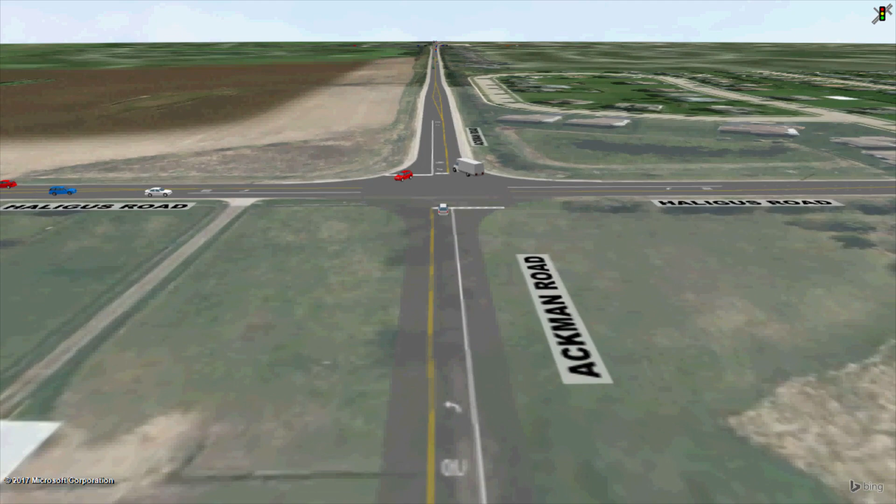Hello, everyone. My name is Emily Dauscher, and I'm the Planning Liaison at McHenry County Division of Transportation. Joining me are Ryan Peterson, Transportation Planner, and Scott Hennings, Assistant Director of Transportation at the DOT. This presentation has been pre-recorded for viewing before, during, or after the live meeting, and it will walk you through some of the work done to date on the Ackman Road Feasibility Study.

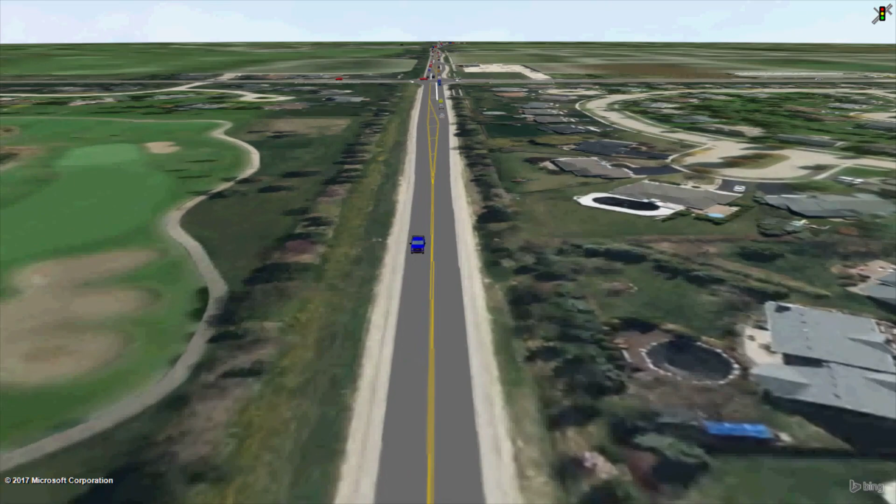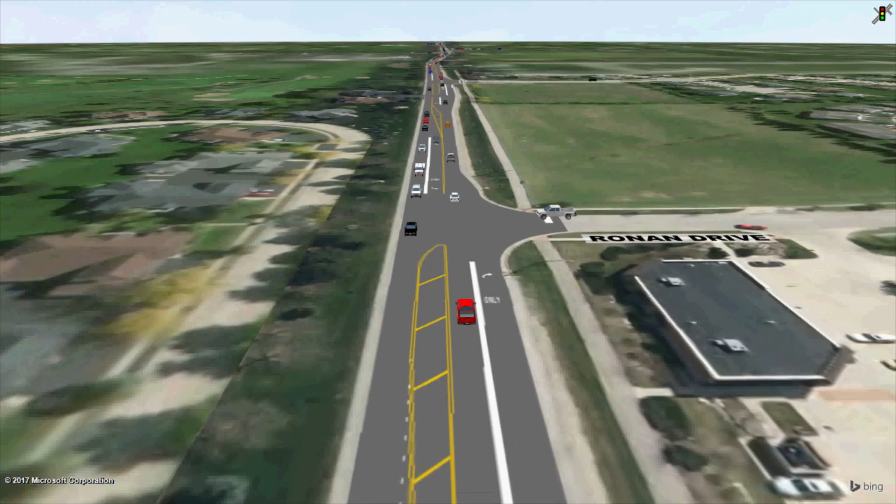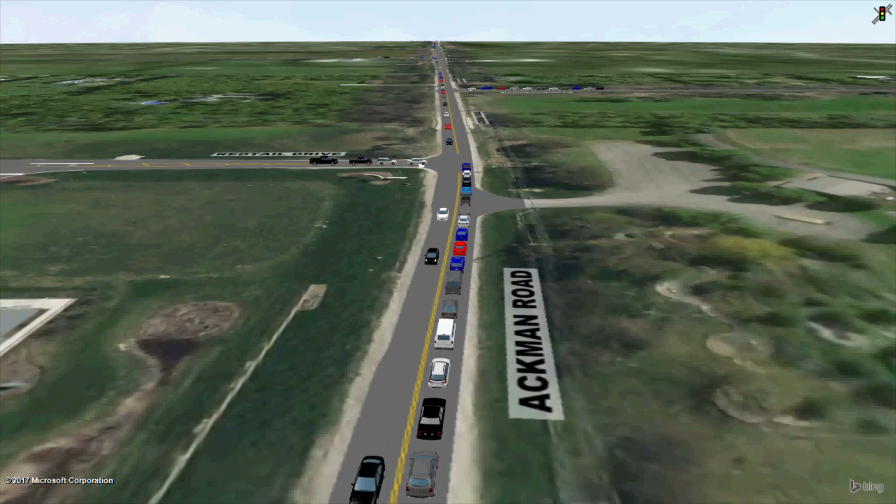What you're seeing now is a video of Ackman Road and what it'll look like in 2050 if no changes are implemented. During this presentation, I'll start us off with some information about the study and the need for the project. Then Ryan will discuss the 3 segments of the project, as well as a couple of the different concepts for the roadway. Following that, Scott will talk about traffic operations and the information that was determined throughout the study. Finally, I'll end the presentation by talking about the project's next steps in the September 29th live meeting.

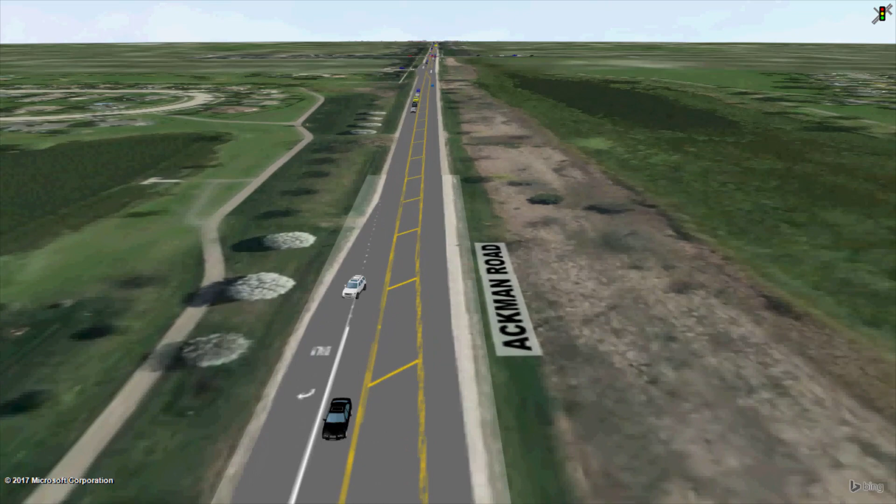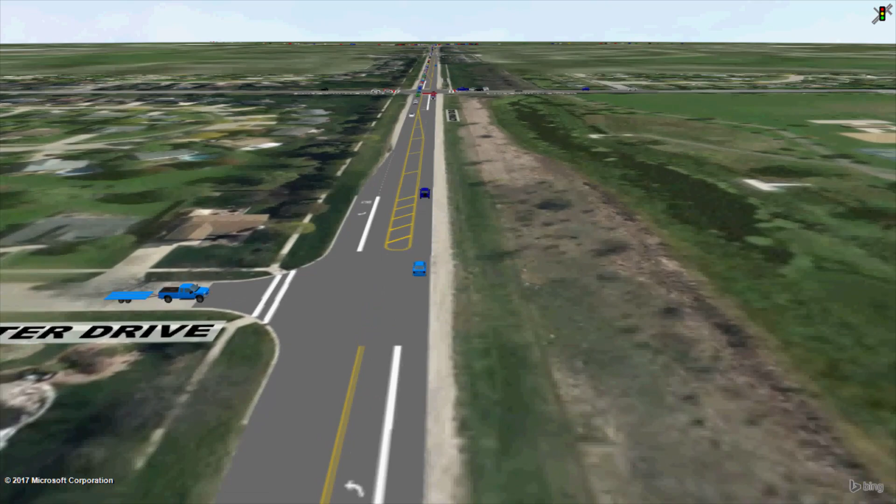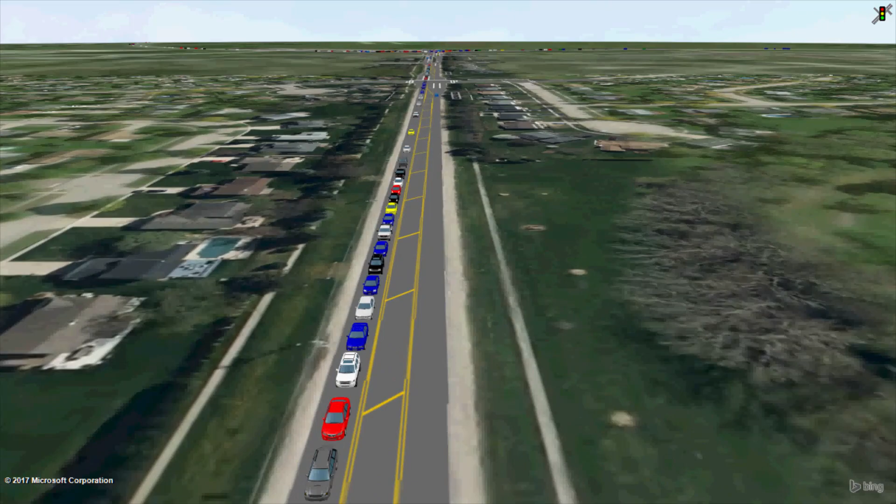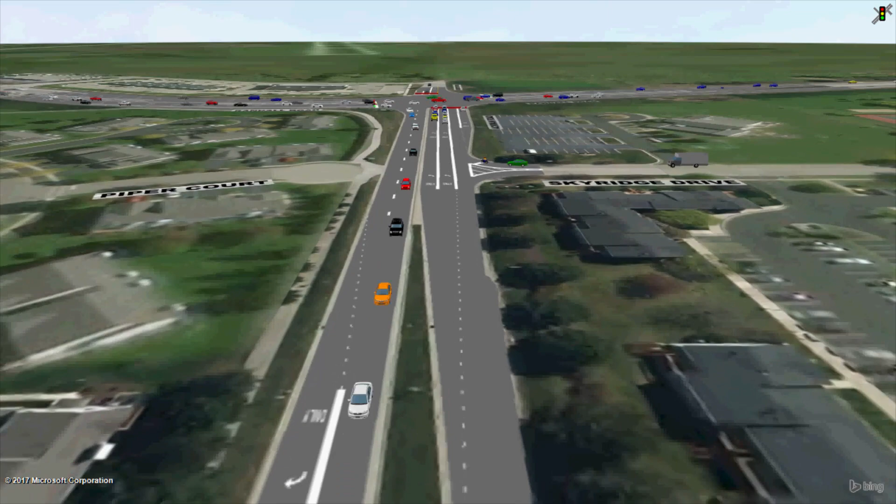As mentioned, this meeting is for a feasibility study on Ackman Road from Haligus Road to Randall Road. The purpose of the feasibility study is to look in depth at possible engineering solutions for the corridor. Since the first public open house meeting on May 30th last year, the DOT, along with its consultant, TranSystems, has been looking at the existing conditions to identify different alternatives that address 3 key project needs: safety, traffic operations, and connectivity. Once identified, those alternatives can be examined further during future project phases, including preliminary engineering, design engineering, land acquisition, and then construction. Identifying preferred alternatives also helps with identifying potential funding opportunities for the project.

Let's review 3 key project needs that are being addressed by this feasibility study in a bit more detail. The first is safety. Along Ackman Road, there are undefined shoulders, areas with poor pavement condition, and poor drainage, as well as intersections with tight turning maneuvers. Off the roadway, sidewalks are narrow or non-existent, and the corridor lacks a defined space for cyclists. There are also unmarked crosswalks throughout the corridor, making it difficult for people on foot or bike to get across the road. The second need is traffic operations.

Traffic operations refers to the movement of vehicles through an intersection. Key components of efficient traffic operation include turn lanes, traffic controls, storage bays, and turning radii. One way to measure efficiencies in traffic operations is through measuring the level of service. Think of the level of service as how easily or comfortably a user can travel through a corridor or intersection. Level of service is measured from A to F, with A and B being the most favorable, C and D being moderate, and F being the least favorable. Throughout the corridor, a lack of turn lanes at intersections contributes to a poor level of service and negatively impacts traffic operations.

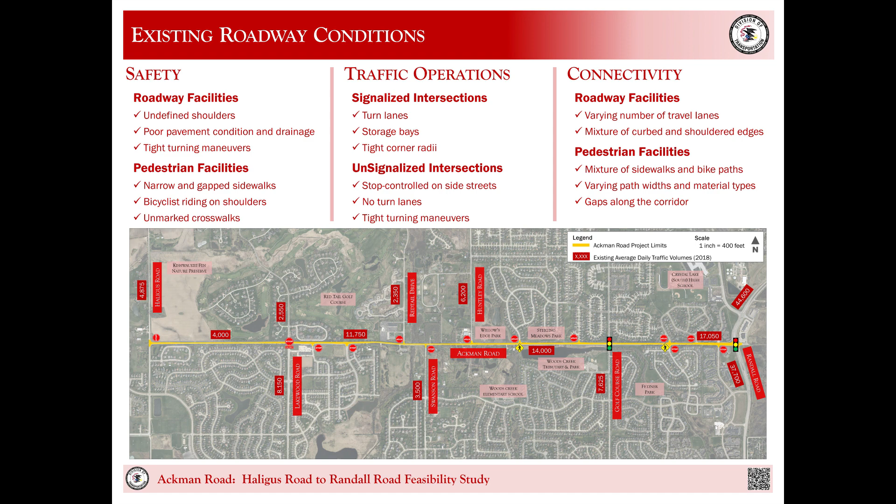Thanks, Emily, for the great introduction. As Emily mentioned, I'm Ryan Peterson. I'm a transportation planner for the McHenry County DOT. I'm going to be talking about a variety of different topics relating to the Ackman Road project. The first topic I want to talk about is the division of segments for the Ackman Road project. So to make it easier for attendees to ask questions and for staff to provide more in-depth answers, we have divided the corridor into 3 segments. Segment 1 is from Haligus Road to Lakewood Road. Segment 2 is from Redtail Drive to Huntley Road and includes the intersection with Swanson Road.

Segment 3 is from Golf Course Road to Randall Road and includes the Westport Ridge intersection. The project plans to address the identified needs on all 3 segments, but different treatments or strategies may be employed for each section depending on the traffic volumes, adjacent land uses, and/or existing conditions. We hope that this feasibility study will help us prioritize which segment has the greatest existing need and the most consensus from the public on solutions.

We will then look to accelerate engineering on that segment first and address the remaining segments at a later date. We also hope this project will give us an idea of potential interim improvements that can be made immediately and at a low cost. Finally, this feasibility study will consider and be consistent with other long-term transportation projects in the area.

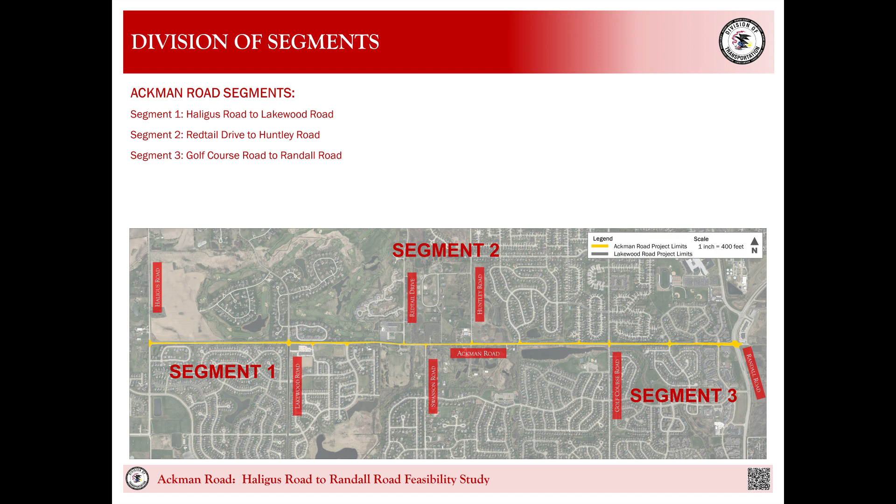For example, both alternatives for Segment 1 will plan for the future extension of Ackman Road west to Illinois 47. The extension project is included within the county's 2040 long-range transportation plan and is supported by the Village of Lake in the Hills. The 2050 projected traffic volumes you will see later in this presentation take this extension project into account.

The second topic I want to talk about are the 2 different cross-section designs proposed by our consultants. The county is looking for input on 2 different cross-section designs, a rural design with shoulders and ditches, and an urban design with curb and gutter. A roadway cross-section displays the desired width, slope, and elevation of a roadway design. The major differences between the 2 proposed cross-sections is the placement of the multi-use path and the overall width.

In areas with constrained right-of-way, the urban section is usually preferred. The rural cross-section allows the multi-use path to be placed further away from the roadway, while the urban cross-section brings the multi-use path much closer to the roadway.

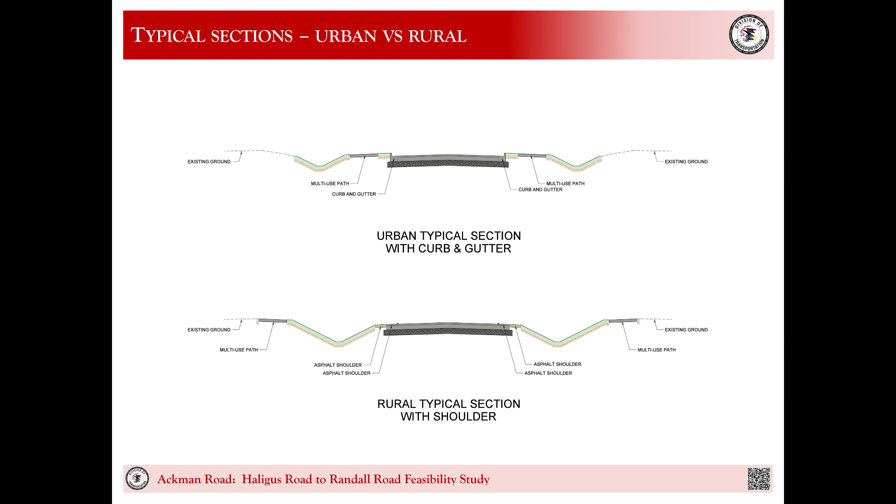And the last topic I want to talk about are the existing bicycle and pedestrian facilities along the project. Currently, on the west end of the project, there's an 8-foot wide shared use path on the south side of Ackman Road, starting just east of Lakewood Road, that travels for approximately 0.3 miles before terminating in front of the residential area east of Albrecht Road. Continuing east, there are no existing bicycle or pedestrian facilities until Amberwood Drive.

On the east portion of the project limits, there are a mixture of sidewalks and shared use paths. A sidewalk on the north side of Ackman Road runs from Sterling Meadows Park east through Golf Course Road and continues to Randall Road, where it connects to a shared use path that runs north to Crystal Lake South High School. At Sterling Meadows Park, the sidewalk connects to a shared use path that runs to the west and enters Willow Edge Park, where the path then turns north along Huntley Road.

The new rapid flashing beacon crossing on Ackman Road at Amberwood Drive, just east of Huntley Road, is located along this path connecting to the shared use paths that run through Woods Creek Park and Fetzer Park along the south side of Ackman Road.

While many bicycle and pedestrian accommodations are present, the Ackman Road corridor does not have the desired connectivity considering the residential nature of the neighborhood and the proximity of a nearby high school and several grade schools. Not to mention there are 15 recreational spaces in the corridor, which are currently not accessible by walking or biking. By connecting these short segments of sidewalks and shared use paths, it will greatly improve the safety and accessibility for those wishing to access all of the amazing amenities offered throughout this corridor.

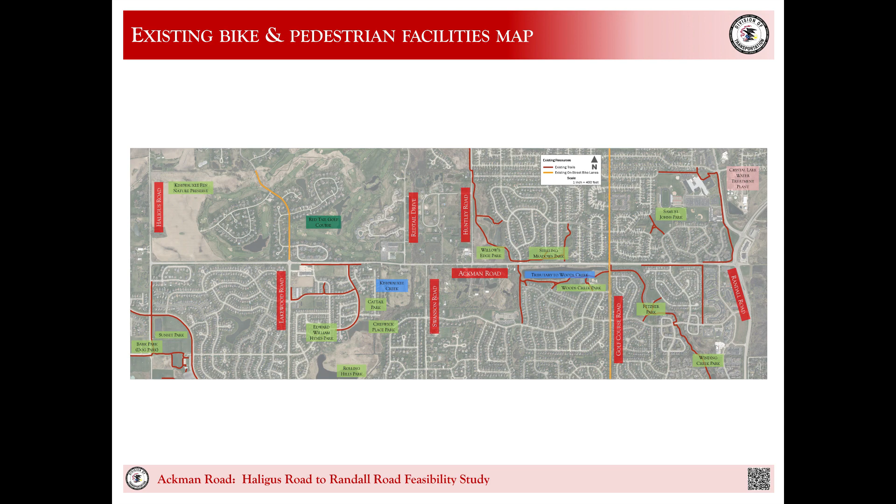And now I'll turn it over to Scott Headings, who will talk more about the project.

The need to improve traffic operations at the intersections along Ackman Road was frequently cited by many attendees at our May 30th, 2019 open house. Typically, roadway agencies improve traffic flow at intersections in one of 2 ways: by installing a traffic signal and associated turn lanes, or by constructing a roundabout. These 2 intersection designs provide several unique advantages, but also each have challenges that need to be considered.

Traffic signals are the most common intersection type that most drivers experience on a daily basis. MCDOT has 42 intersections in its system with traffic signals, while IDOT and other local governments have many more on their systems. Traffic signals have the advantage of reducing intersection delay when compared with stop sign control. They also typically require less right-of-way than roundabouts, even when you factor in additional left and right turn lanes that may be needed.

Finally, traffic signals can utilize emergency vehicle preemption, whereby emergency vehicles are given a green light as they approach the intersection. However, traffic signals also pose some challenges when compared with other intersection designs.

For one, the potential for serious or even fatal collisions can actually increase at an intersection after a traffic signal is installed. Collisions that occur at signalized intersections tend to be more severe rear end and angle crashes with vehicles traveling at high rates of speed.

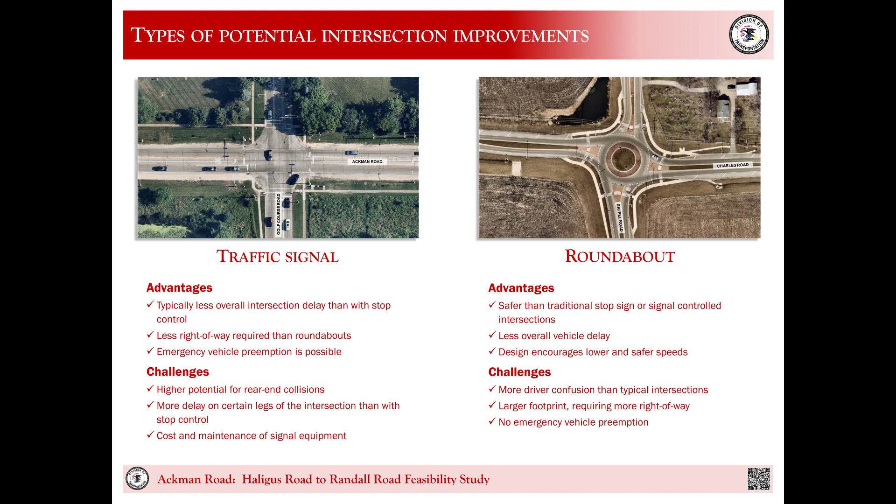Roundabouts typically require more right-of-way and have a larger footprint within the proximity of the intersection when compared with a signalized intersection. However, as you move away from the intersection, the right-of-way requirements decrease dramatically since roundabouts require fewer turn lanes approaching the intersection.

As Ryan mentioned earlier, this feasibility study divided the Ackman Road corridor into 3 main segments. The first being from Haligus Road to Lakewood Road, the second from Redtail Drive to Huntley Road, and the third from Golf Course Road to Randall Road. For each segment, the study team looked at a few different options or alternatives and compared them against the existing conditions. The alternatives were scored against a set of criteria that considered safety, mobility, environmental impacts, and cost.

So let's jump right into segment 1. Currently, the Haligus and Lakewood intersections are stop controlled. Option 1 looks at adding a traffic signal and turn lanes at Haligus Road, while leaving the Lakewood Road intersection with a stop control. Option 2, on the other hand, looked at the potential for roundabouts at both intersections.

This slide shows an aerial view of the 2 intersections under option 1. You will notice that the map on the left shows Ackman Road extended west beyond Haligus Road, which is a future project identified in the county's long-range transportation plan. The Ackman-Lakewood intersection is shown to remain a 4-way stop because traffic signals were not warranted at this location in the future design year of 2050.

This next slide shows option 2, which proposes roundabouts at both intersections. The medians and the center of the roundabouts are shown to be landscaped, and pedestrian crossings will be added to all 4 legs to connect the proposed sidewalks and trails.

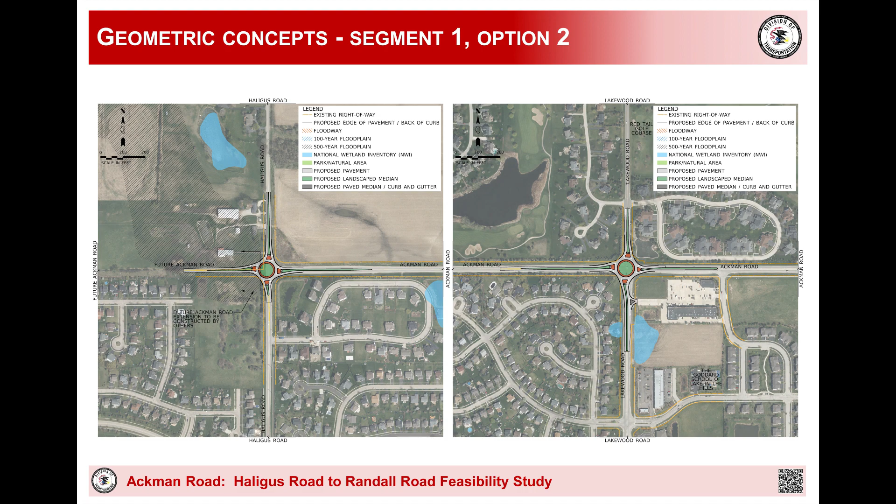When comparing options 1 and 2 against the 2050 no-build conditions, which shows the intersections with no improvements, both options performed well in the mobility category, improving the overall level of service and delay at the intersections. The roundabout alternative performed better than the traffic signal alternative in the safety category, as well as the water quality and cost categories.

Next, let's move on to segment 2, which encompasses the Redtail, Swanson, and Huntley Road intersections. Currently, vehicles approaching Ackman Road from the 3 north-south roads are required to stop and wait for an opening in traffic to make their turn onto Ackman Road.

Option 1 maintains the free flow of traffic along Ackman Road and a stop control for the 3 minor streets, but adds turn lanes at the Redtail and Swanson intersections. This alternative would allow traffic to flow more smoothly along Ackman Road because turning traffic would not interfere with through traffic as it does today.

Option 2 adds a traffic signal and turn lanes at all 3 intersections, while option 3 adds a roundabout at all 3 intersections. Note that the Huntley Road intersection is shown with a right turn bypass lane to handle the higher traffic volumes at this intersection.

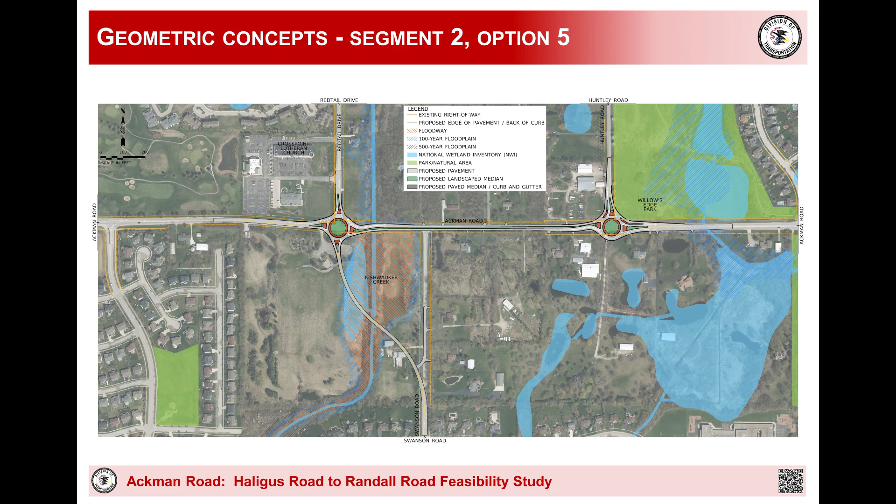When comparing these 5 options against one another, it is easy to become overwhelmed by the amount of information. Looking at safety improvement only, the roundabout alternatives scored the best. Each option improves the overall level of service when compared against the no build in year 2050. However, it's important to understand that under all options, vehicle delay will increase when compared with the conditions today. Looking at the property acquisition criteria, options 1 and 2 scored the best. And when comparing cost, the roundabout options typically scored better than the traffic signal options.

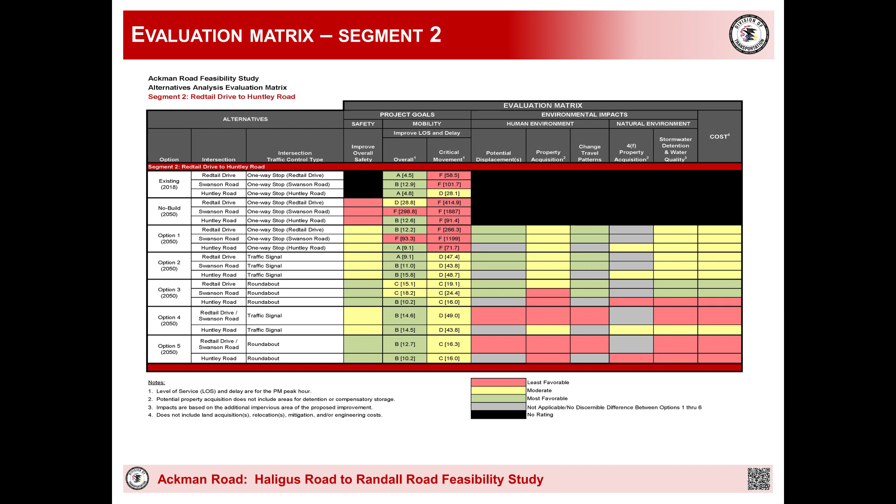Finally, let's move on to segment 3, which looked at the area from Golf Course Road to Randall Road. Today, the intersection with Golf Course Road is signalized, but lacks turn lanes to separate through traffic with traffic making right turns. The intersection with Westport Ridge is a 2-way stop controlled, while the intersection with Randall Road is signalized and fully built out with all turn lanes. Generally, no improvements are being considered at the Randall Road intersection.

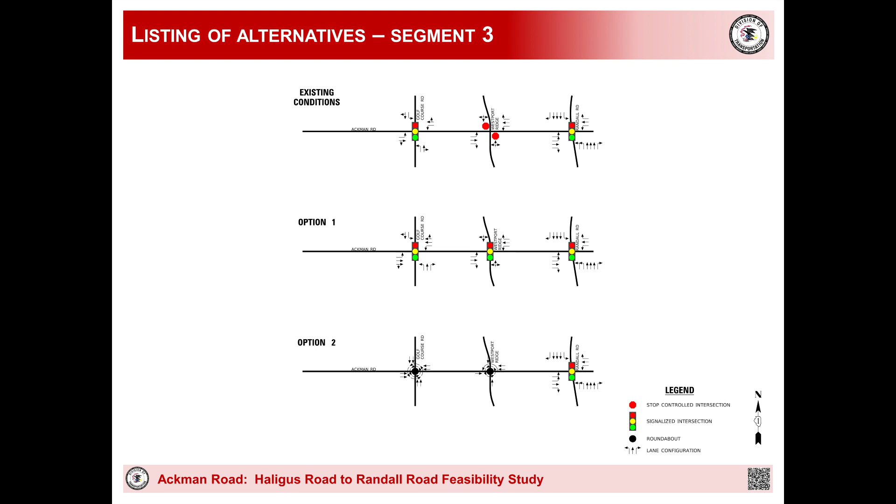Option 1 considers the addition of through lanes on Ackman Road, along with a northbound right turn lane on Golf Course Road and the signalization of Westport Ridge. Option 2 considers the installation of a multi-lane roundabout at the Golf Course intersection and the installation of a single-lane roundabout at Westport Ridge.

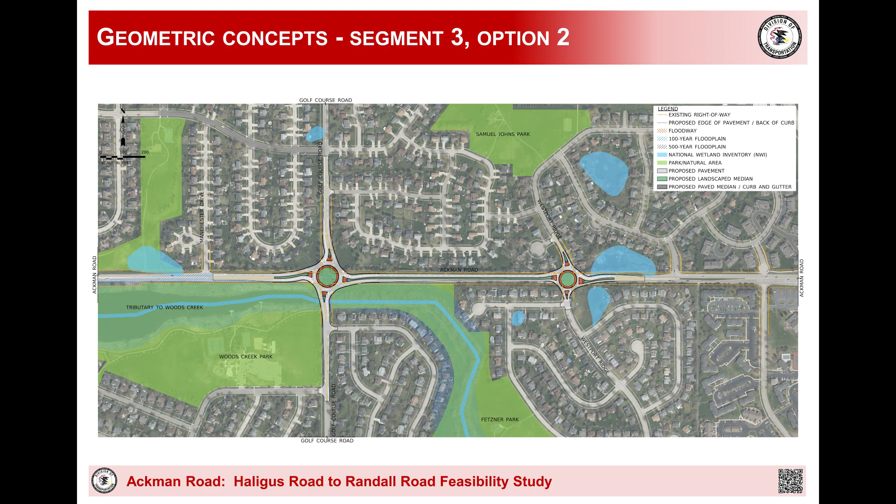Both options improve safety over the no build, but again, the roundabout is superior to the traffic signal for reducing serious and fatal crashes. Both options improve mobility for drivers over the existing conditions. However, the roundabout option performs better than the traffic signal option, especially for the critical movement during the peak hour. Due to the larger footprint of the multi-lane roundabout, the traffic signal option performs better on the potential displacement and property acquisition categories.

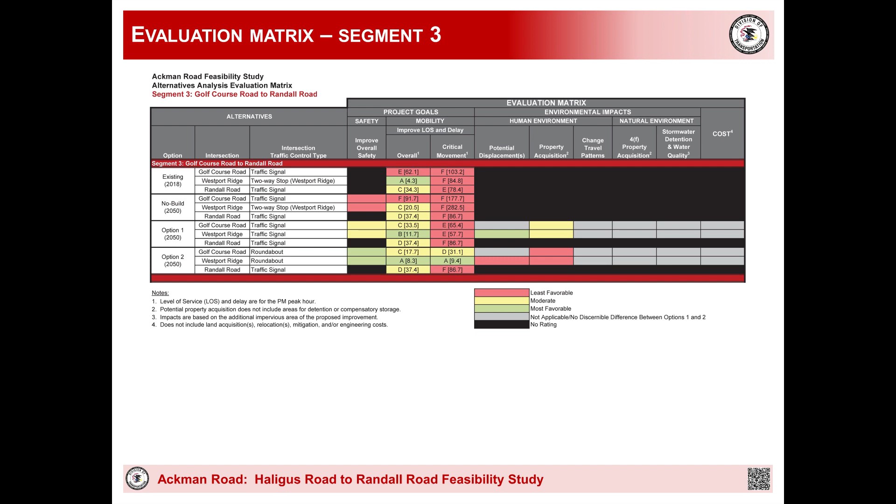Once the feasibility study is concluded, the project will move into engineering to develop more details for the selected solutions. By the end of this study, DOT will have learned about the community interest in the project. This includes not just those who use the roadway or live near it, but also the municipalities along the corridor, which includes Lake in the Hills, Lakewood, and Crystal Lake. The chosen solutions that are carried forward from the study will be selected based on feedback from the community, municipalities, and users. The chosen solutions will also take into account the roadway itself and what improvements are needed based on modeling, traffic data, and other information.

The identified solutions will open up the project for possible federal, state, or regional grants. Depending on what alternatives are chosen, different funding sources may be pursued. Some grants focus on bicycle and pedestrian improvements, some look at safety or congestion, and others are for creating safe routes for kids to walk or bike to school. The project's eligibility for these funding sources may be dependent on the types of improvements chosen. Once funding has been identified, the project will move forward into Phase 2 design engineering, acquiring any necessary land around the corridor, and then construction. This will happen over a number of years.